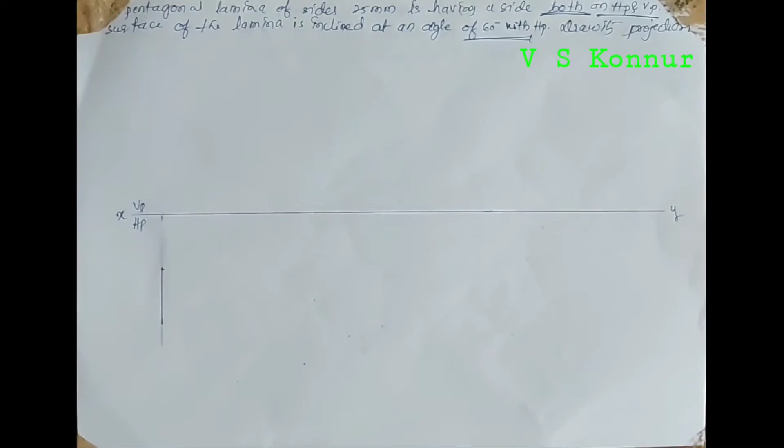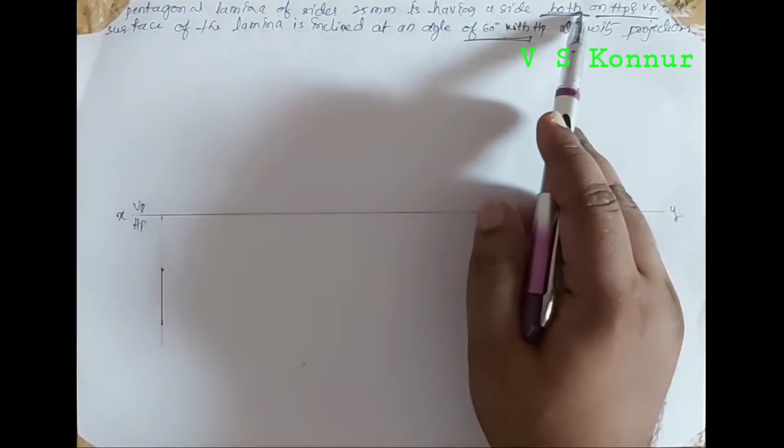The surface of the lamina is inclined at an angle of 60 degree with HP, that is the second position they have given, and draw its projection. If it is given like that, side both on HP and VP means it is resting on HP only, because HP angle they have given. This is the third position, both on VP and HP. Whenever side both on HP and VP is given, it is resting on one of its sides only.

So this indicates resting on edge, because that edge is on HP and VP. Now when it is resting on HP, the first inclination you have to take is 60 degree with HP.

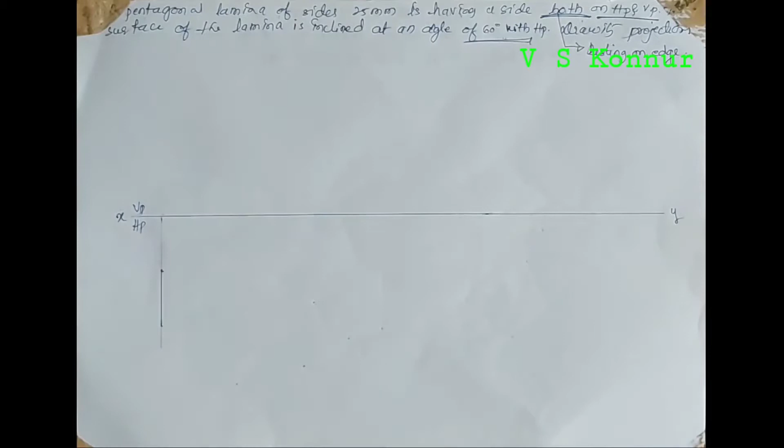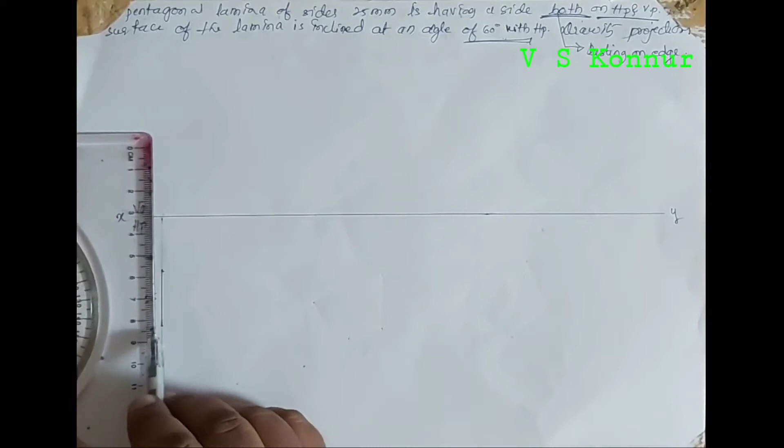Now we will solve this problem. It is resting on one of its sides, 25 mm, because both on HP and VP. When this condition comes in the problem, it is resting on edge only, on HP. So the edge should be on the left side. So 25 mm you have to take at the left side, and you should give the arrow marks of dimension. So that is 25 mm.

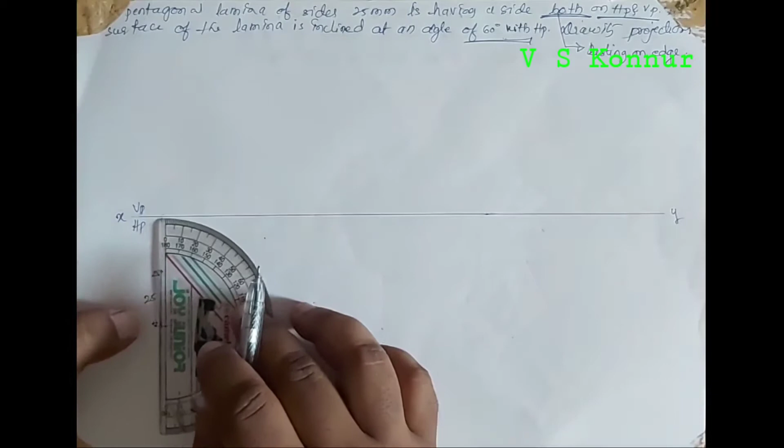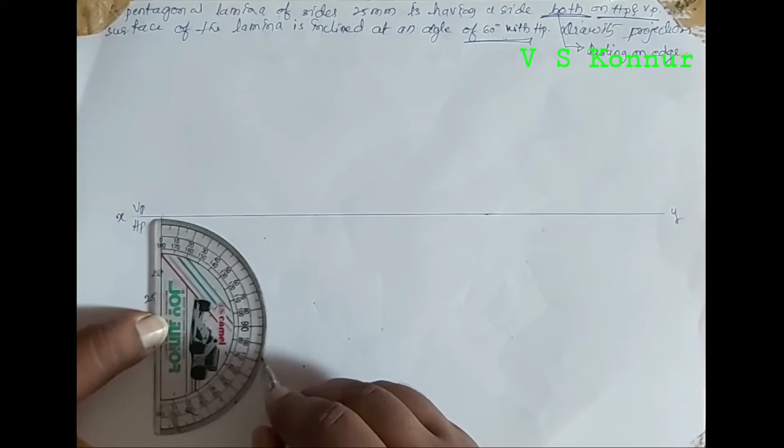Now take an angle of 108 on both the sides. So 108 you have to take, on either side. This is 108. Now join these two with a thin line.

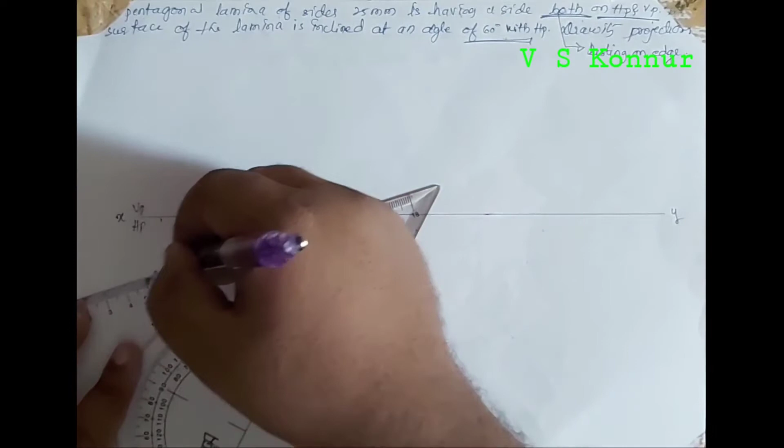Join this point and this point. Draw only as much as required, don't extend more. Then cut it by 25 mm distance, you can take the scale and take the distances.

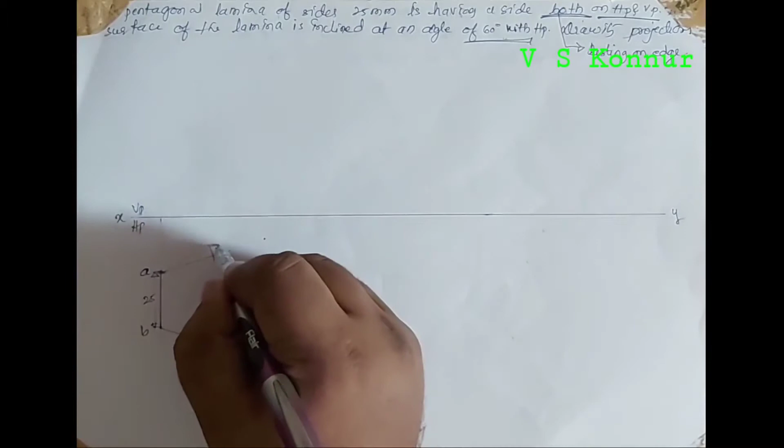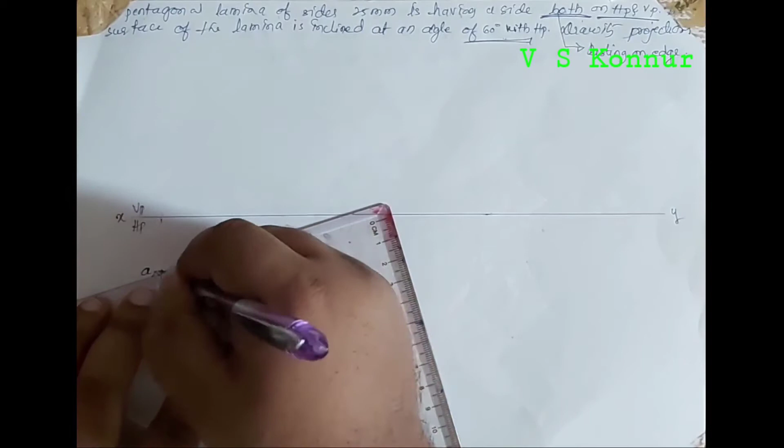And cut it by either side, then from this side. So we get points: this is A point, this is B point, this is C, this is D and E. Now we'll join all these points with dark lines. D we got here, next from E to A, C to B, then from C to D.

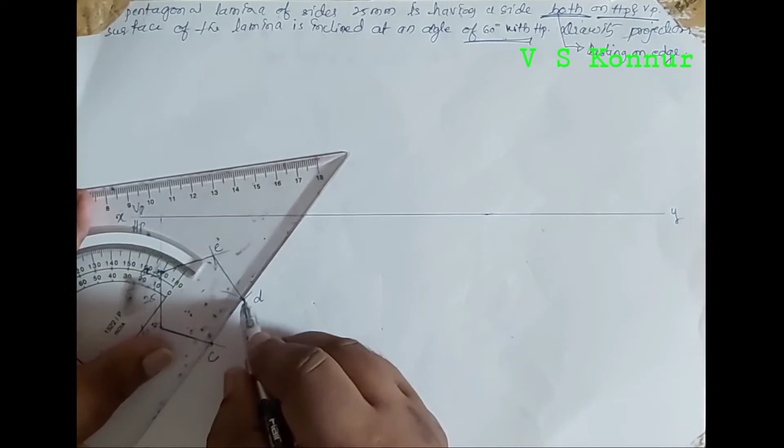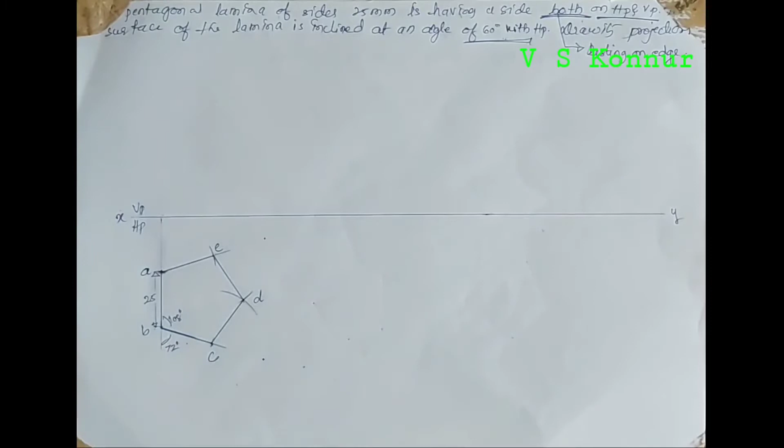Now draw the projector from all the sides, because the inside angle is 108 degree, or outside angle you can take as 72 degree to get the angles. Now these 2 points are intersecting at the same point, so you can draw one projector directly, no need of any parallel lines.

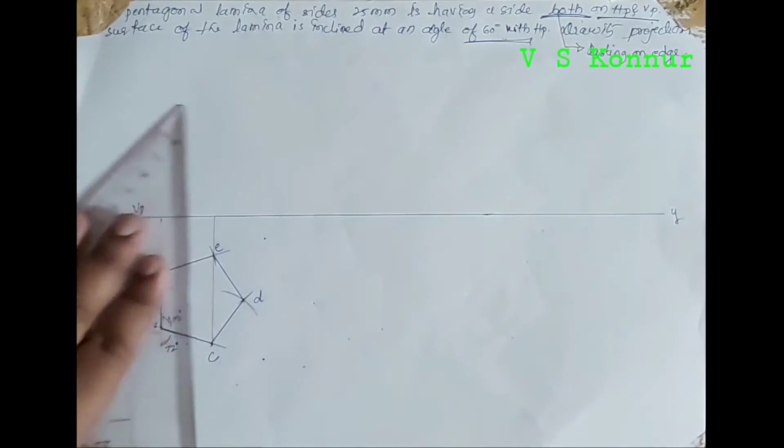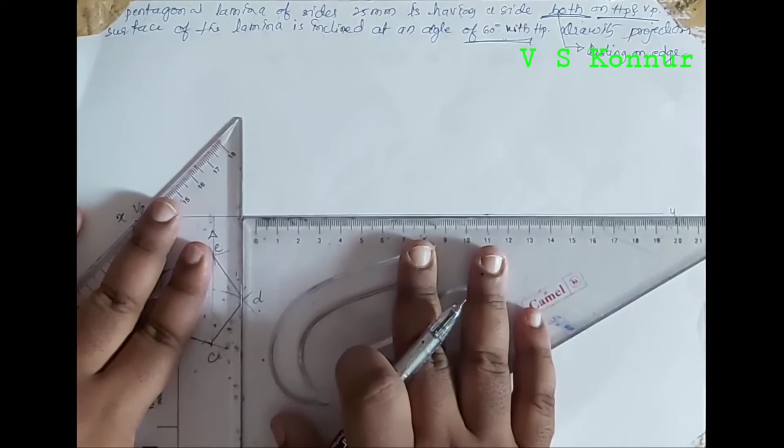So 2 you have drawn. Now you have to draw another one, for that you need a parallel line. If it is in a grid book, no need of these parallel lines, directly you will be having the lines there, you can draw easily. Because it is a white paper, we need parallel lines to get it.

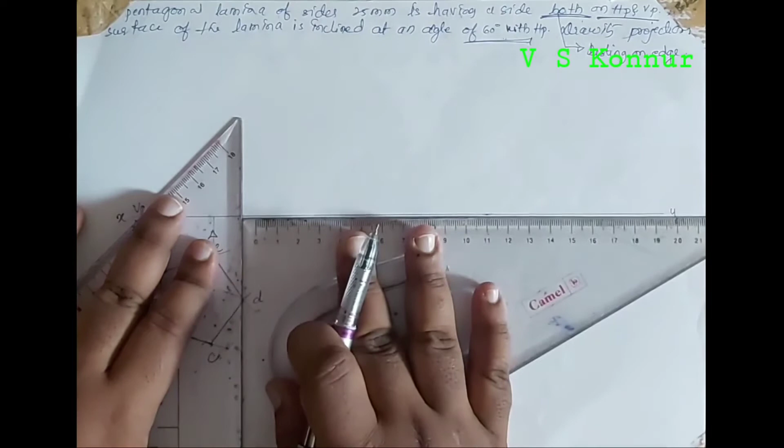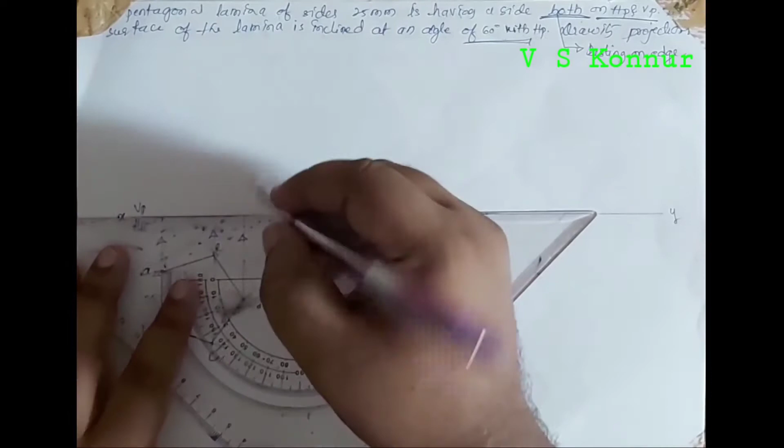Till intersection of the XY line, now we got a lamina of pentagonal plane. Just join these 2 points.

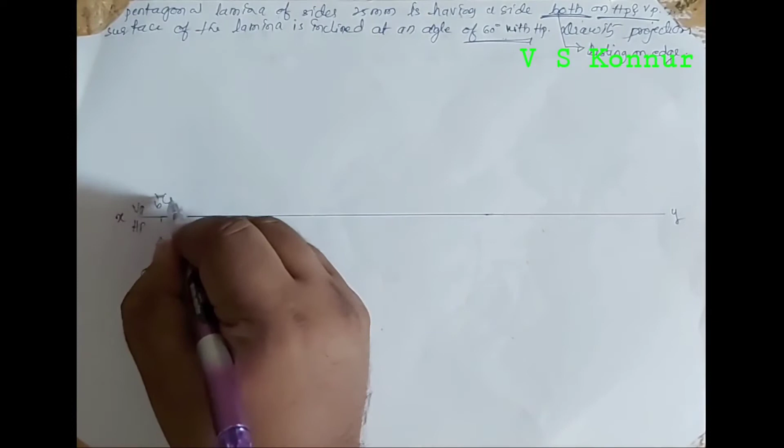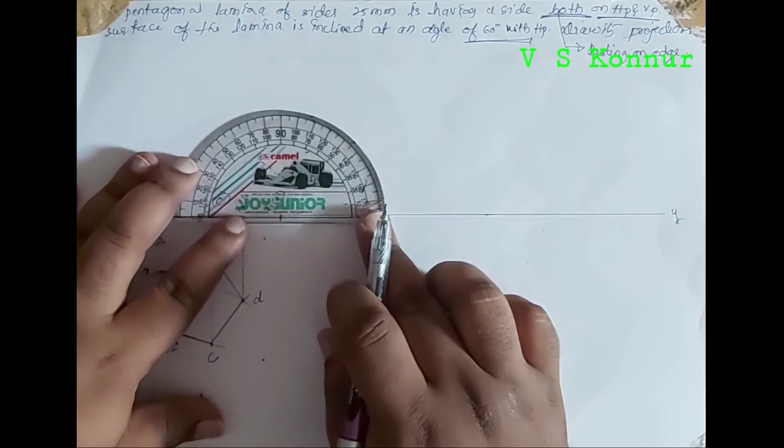Now it is inclined at an angle of 60 degree with HP, so we will take the 60 degree angle by marking here. We will take the 60 degree angle from that point, and that point is called B dash A dash. From that point I have to take 60 degree, as given in the problem. So don't make any errors when taking the angle, because that will give errors in the projections. It is inclined at an angle of 60 degree.

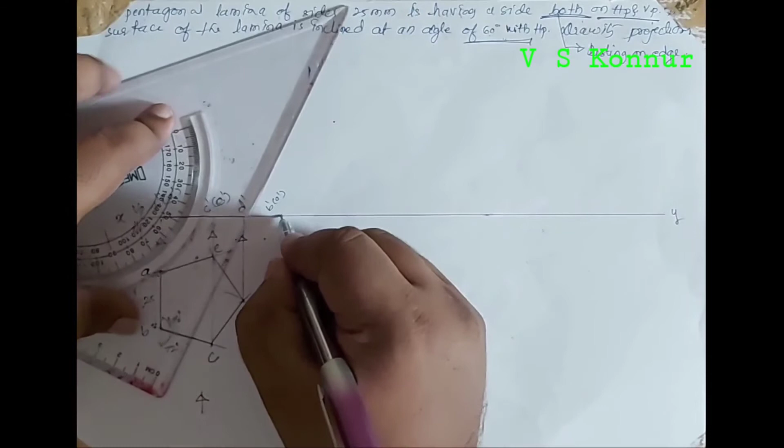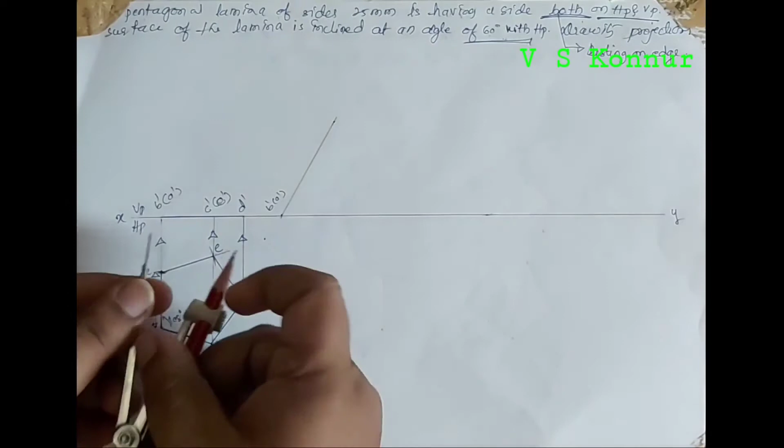So now join with thin lines, with a thin line you have to join. Then cut this by B dash and A dash to D dash distance. Take this distance, right? Take this distance and cut it by keeping at B dash A dash point, cut that line, and then take the distance B dash A dash to C dash.

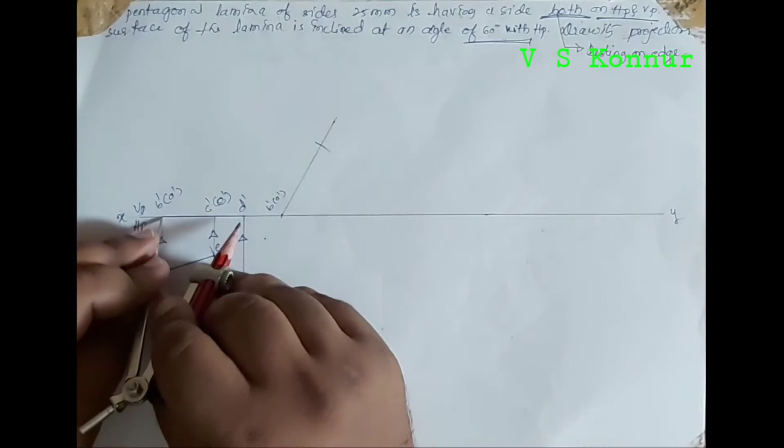So take this distance and cut it once again from keeping at A, B dash A dash point. So you will get 2 points here, that is nothing but C dash and E dash point here, and D dash point here. Now only make that part dark.

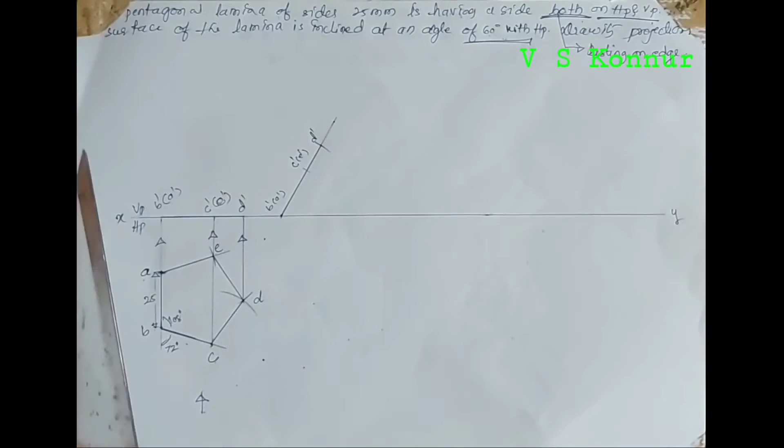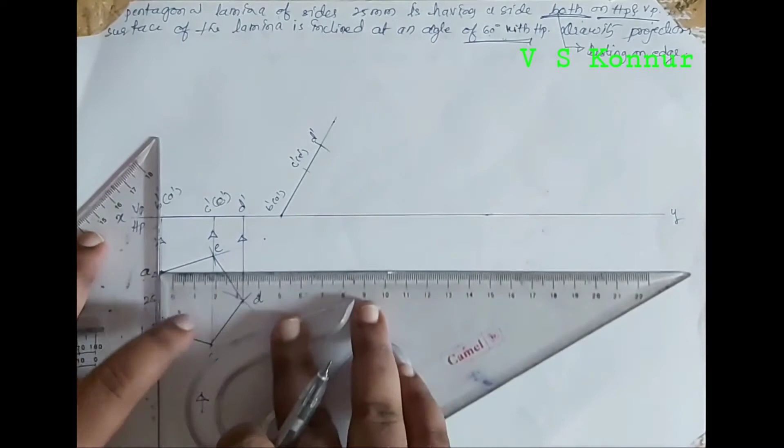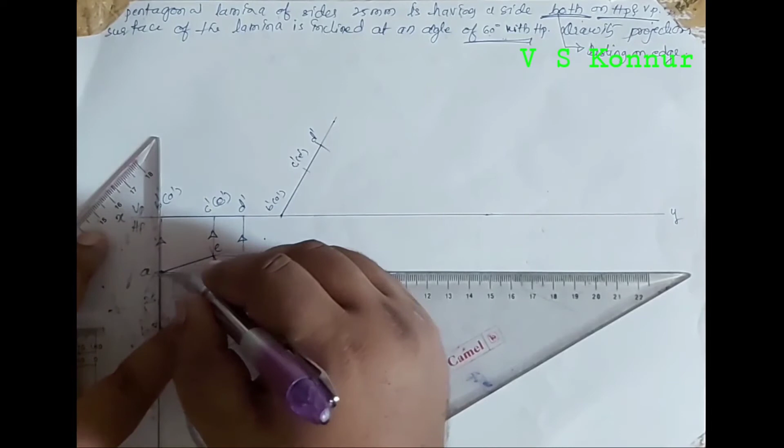Only this dark, and then draw the projector from either side. Now from E point till E, then A point till A, then from B point till B, then C point, and then from D point. Now draw the projector.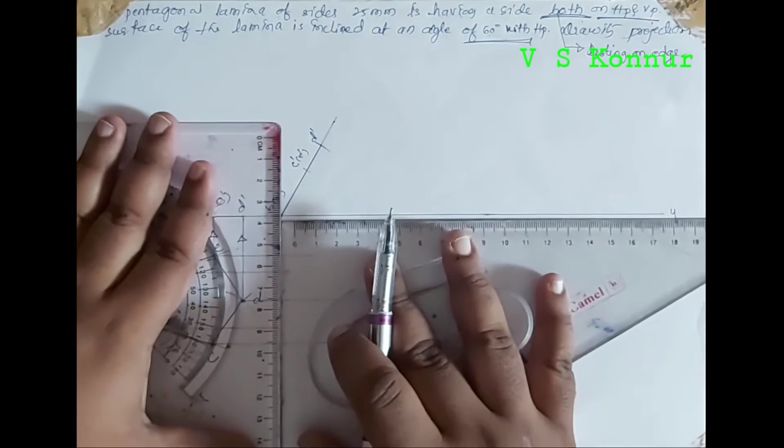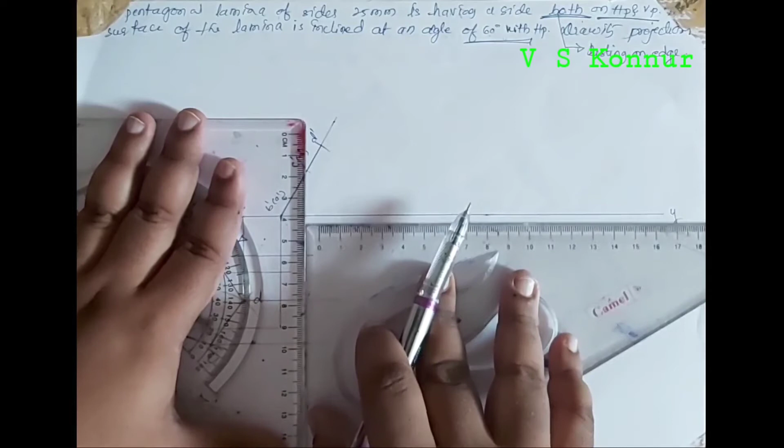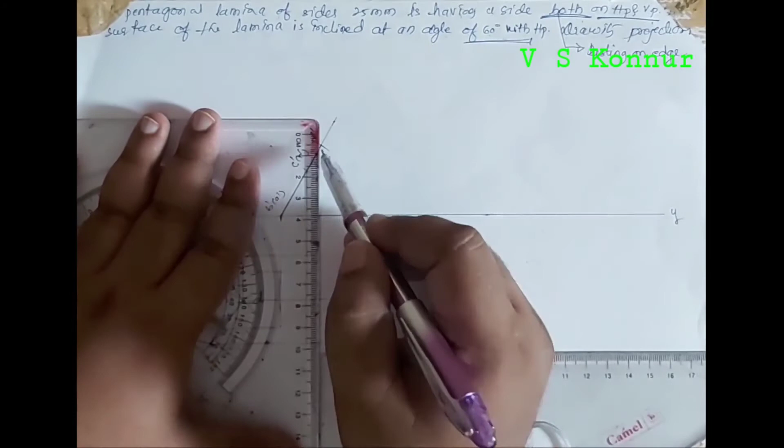Next from B and A till it intersects B and A, and then CE, and then from D point. So now we got all the points, and give the arrow mark for that.

So this inclination is 60 degree. It is given in the problem only. Inclined to HP at an angle of 60 degree. You have to take it in VP.

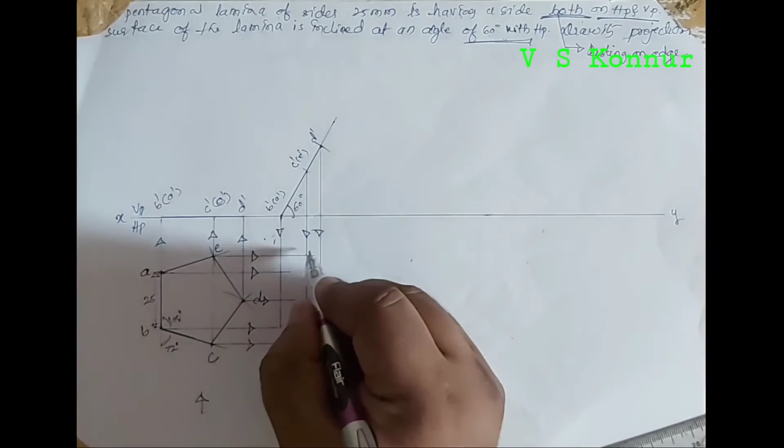Now intersection of D and D is D. This is C point. E and E, E. This is A point. This is B point. Now join all the points.

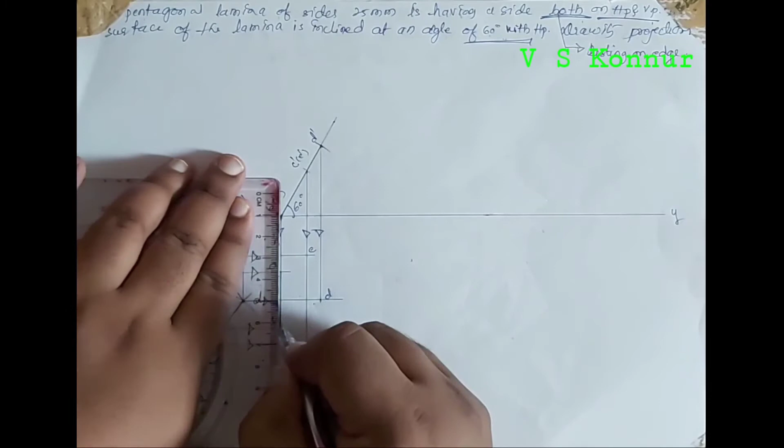A to E, D to E, then C to B.

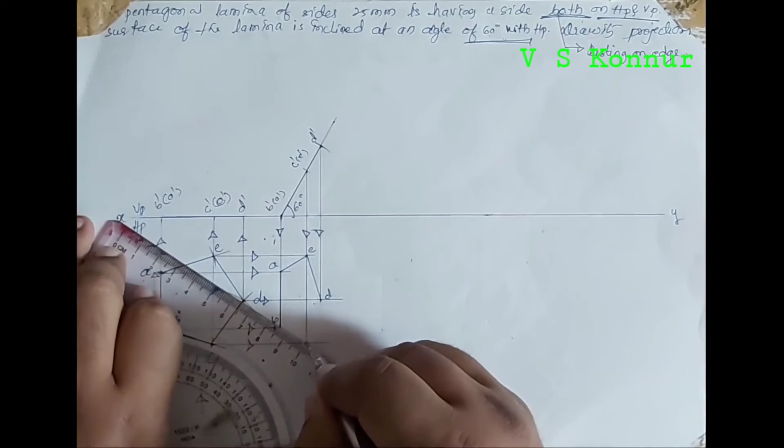So this is the second question. When a lamina is inclined at an angle of 60 degree with HP. Now this edge, so this edge, I am saying this edge is on XY line, that is nothing but 25 mm having a side both on HP and VP.

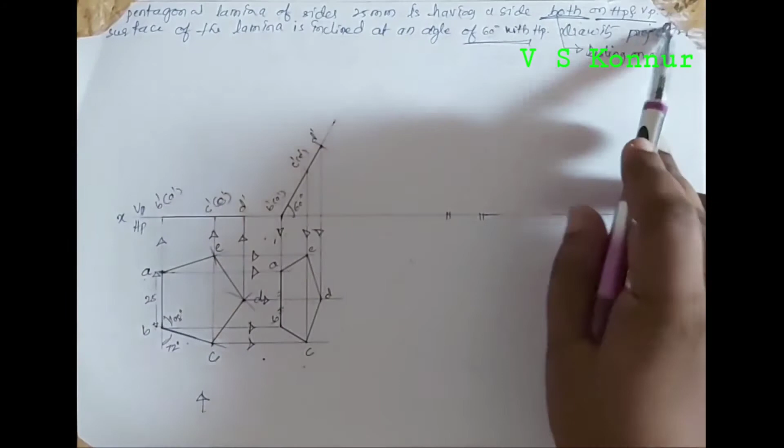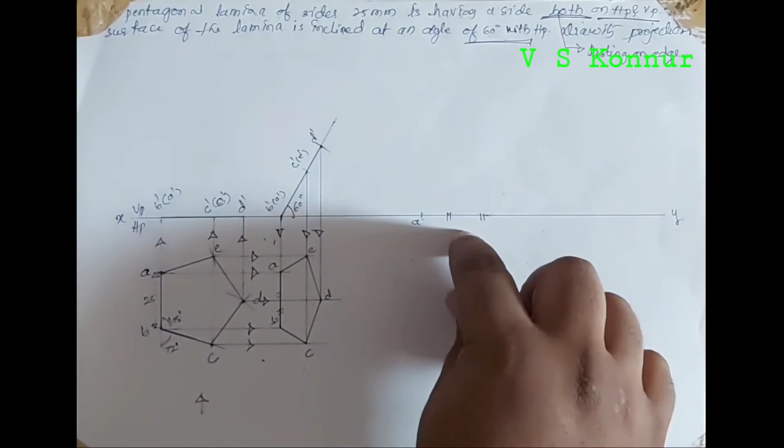This resting side is on VP and HP. So for that I will take, we will mark a point here and we will call it as A point. So we'll rotate and keep here. So this is A point, I will write here and I will cut it by B distance. Just I am rotating this and I am keeping this because the resting edge is both on HP and VP.

We'll take this distance and keeping at A point I will cut XY line. So we got another point here. So this is B point I got here. Now you have to construct this pentagon here.

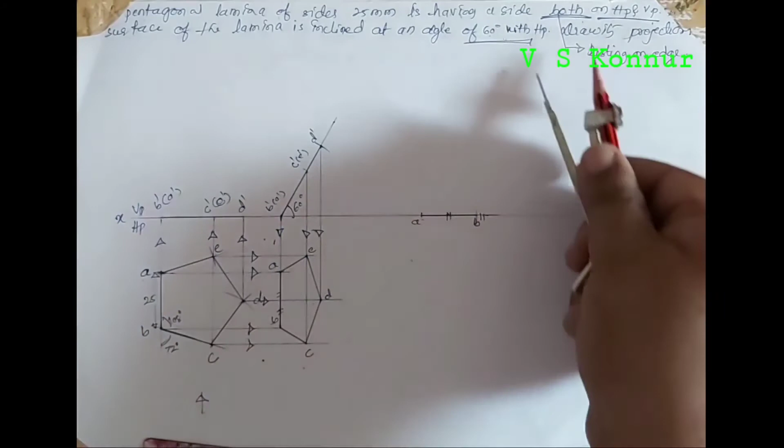That is a resting edge is both on HP and VP. It is given in the problem. Take A to E distance, or you can take B to C distance. Both are having same. So B to C, or you can take A to E. So we will draw arc here.

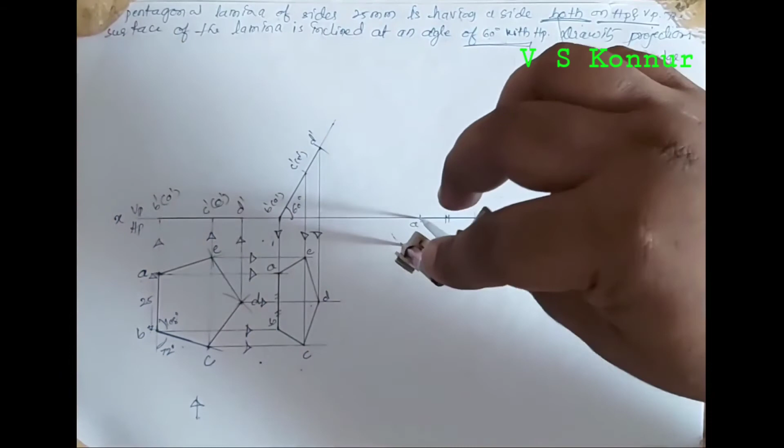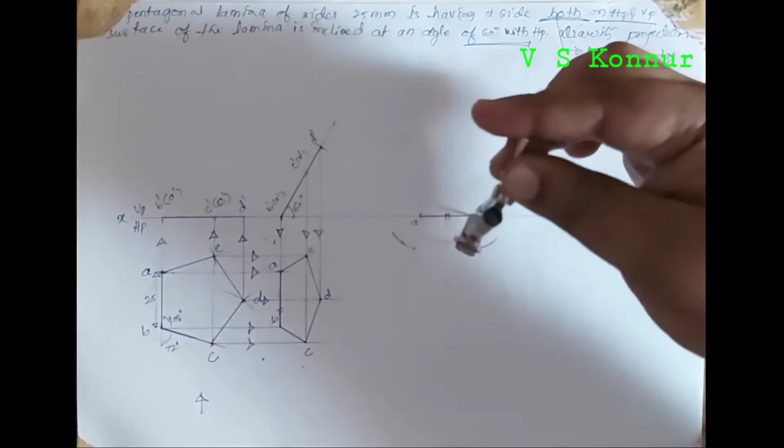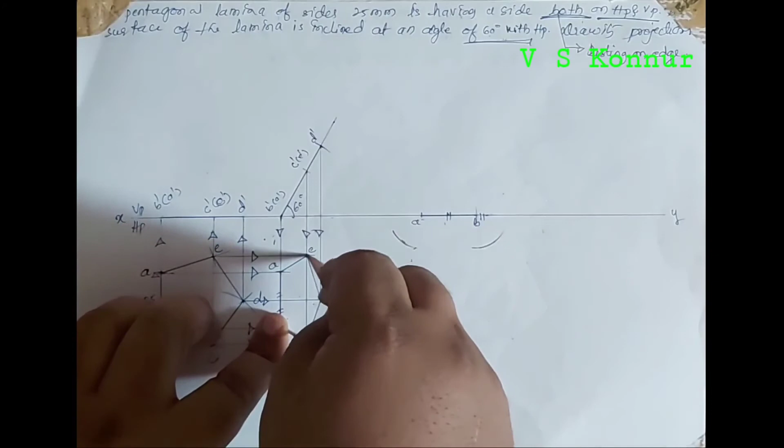And then take distance from opposite edges, opposite corners. So from B I am taking C distance, E distance, or you can take distance from A to C. Now by keeping at A point,

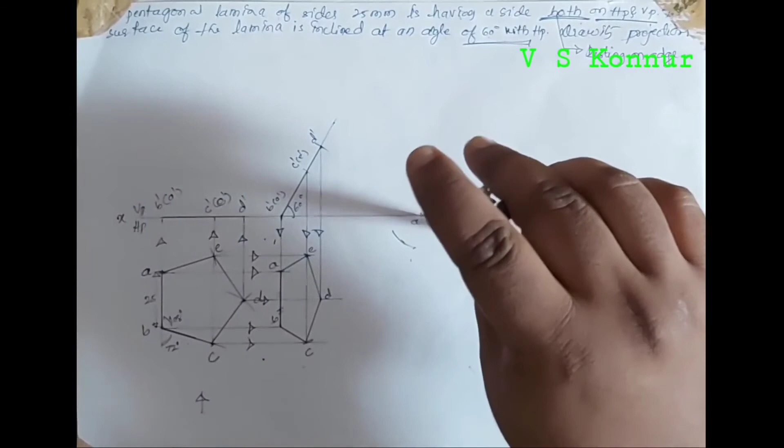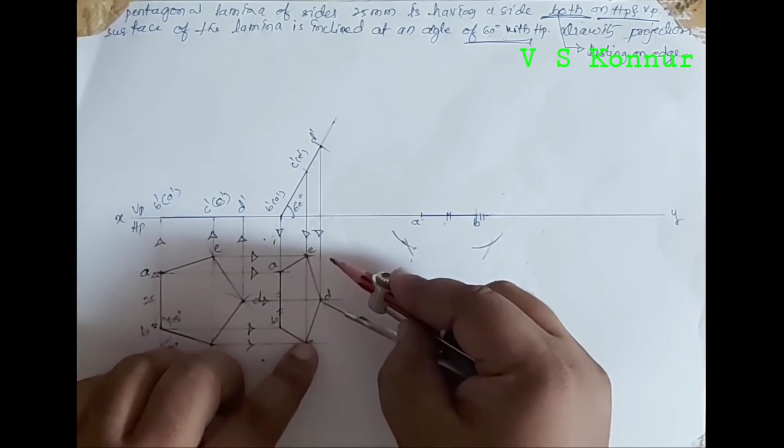we'll cut this arc. Now by keeping at B point, cut this arc. Now we got another 2 points. We'll draw another point, that is C to D, or you can take E point. Both are same.

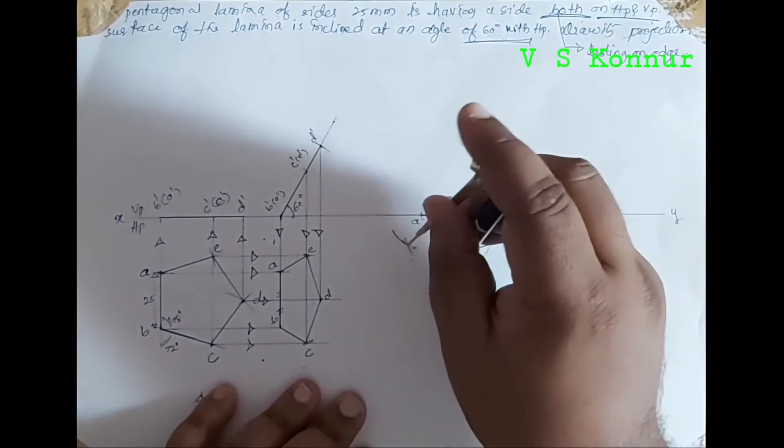So we'll keep at this point. We'll draw arc, and then by keeping it this point, we'll draw one more arc. We got another point. Now we'll join these points.

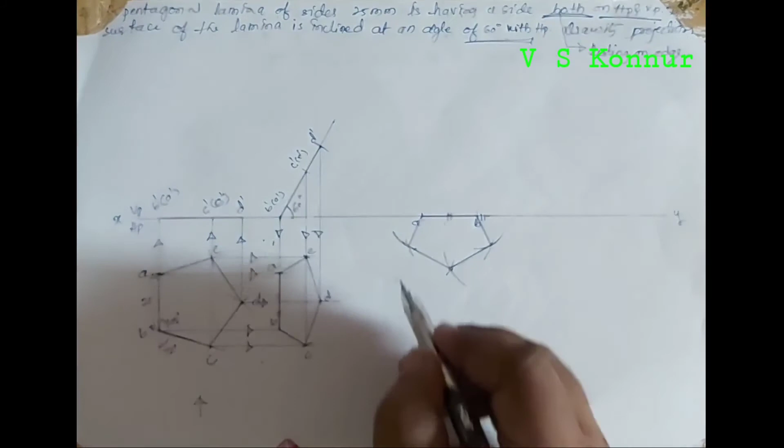Now we got C point, D point and E point. The same pentagon has been transferred here. This has been transferred here, right? The same pentagon. Now we'll draw the projector from these points.

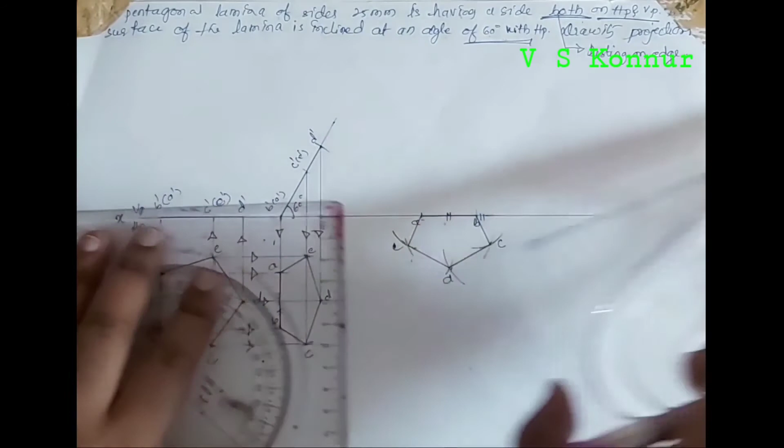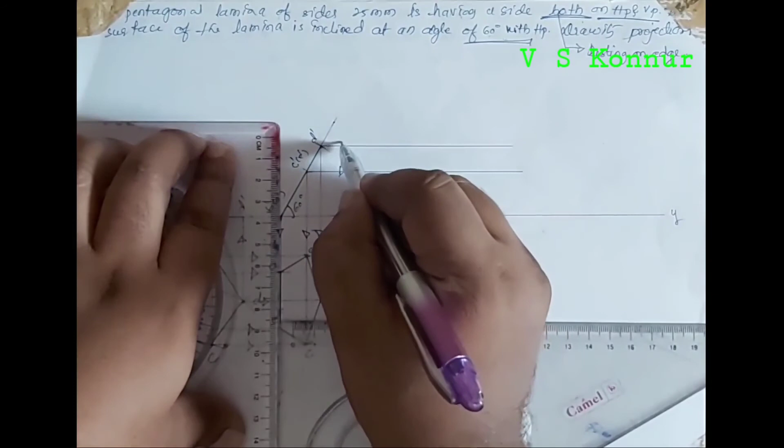A D point. Next from C and E point. Already these other have been drawn, so we'll give the arrow marks on XY line only. So now I'll take from E point, A point, B point, E point, all the point we have to draw the projector.

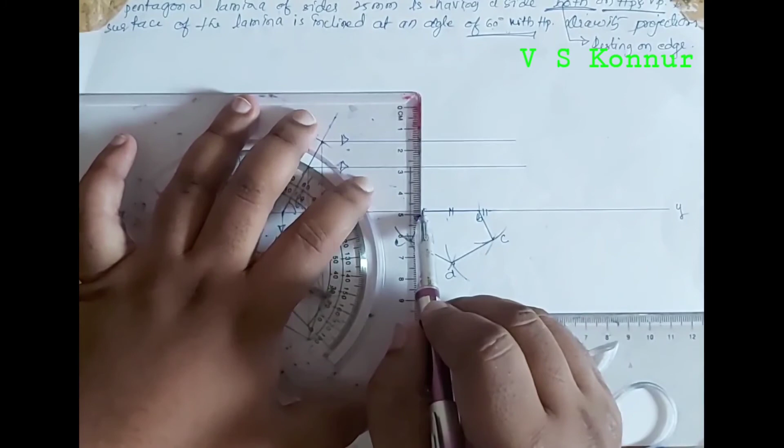Now from E point, so E is here, and then from A point, now from A point we have to draw the projectors, till it intersect A only. So A is on this point only, no need to draw A and B. So we'll go for D point.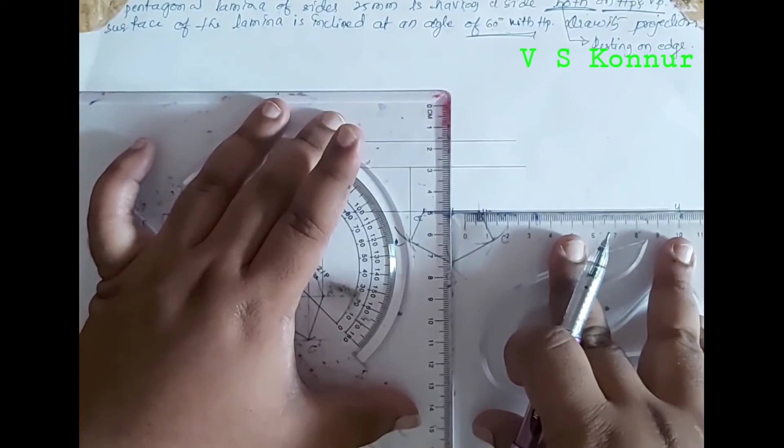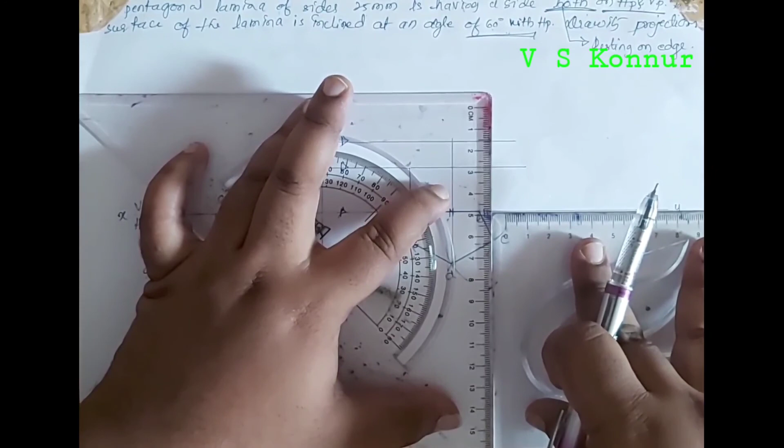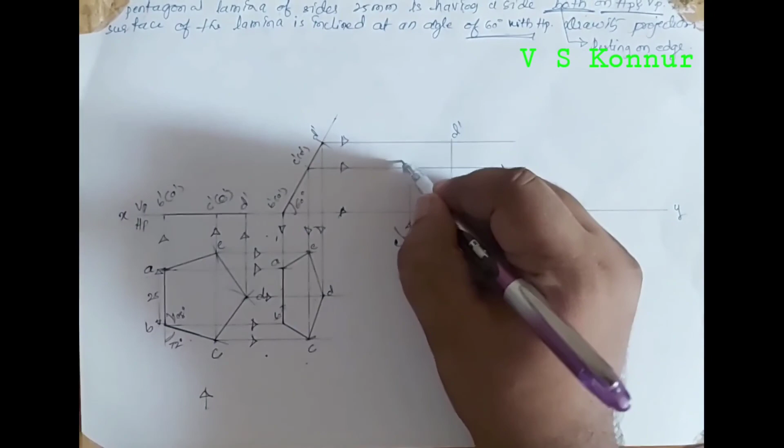Next, from C point you have to draw projector. Drawn all the projectors, so we'll give the arrow marks. So A dash is here only, it is B dash, this is C dash, this is D dash, and it is E dash. Now we'll join all the points.

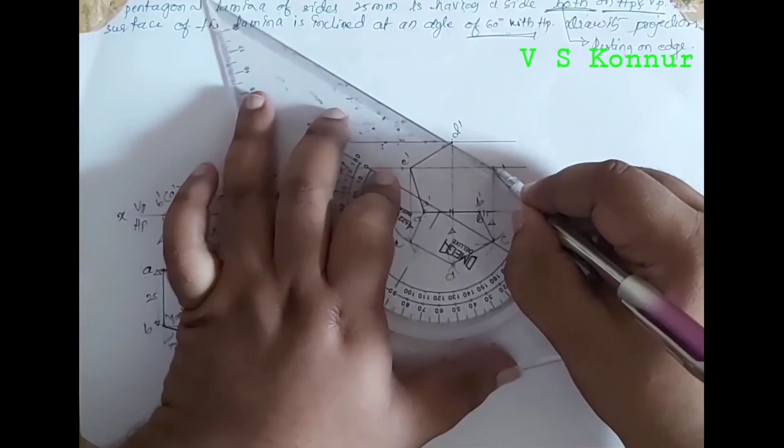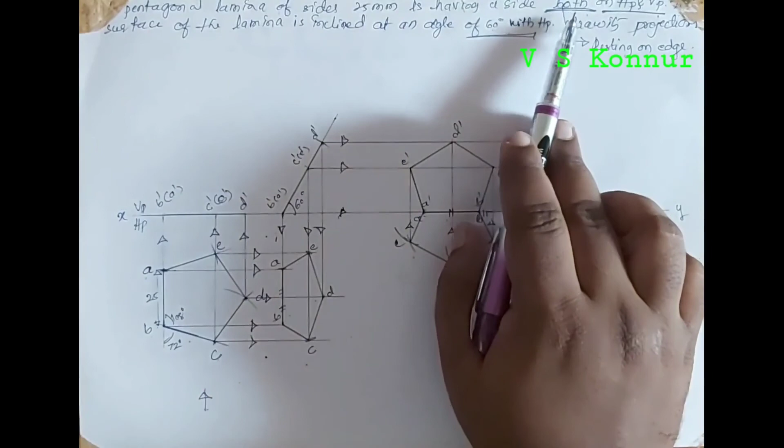This is how you have to construct when a side is both on HP. This is a side which is both on HP and VP. So this is how you have to construct, and it should be resting on one of its edge only.